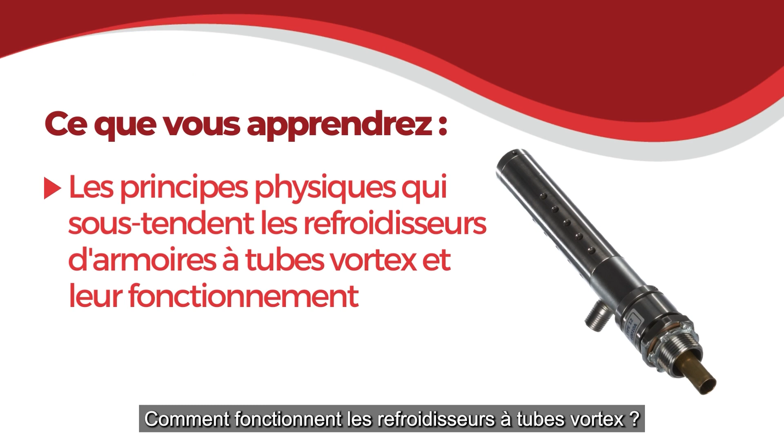How do vortex tube coolers work? When you first come across vortex tubes, they seem like magic. We have a device that has no moving parts, no power source other than the compressed air that goes into it, and can produce temperatures down to minus 40 degrees C from an ambient air temperature. All this with no refrigerant chemicals being used.

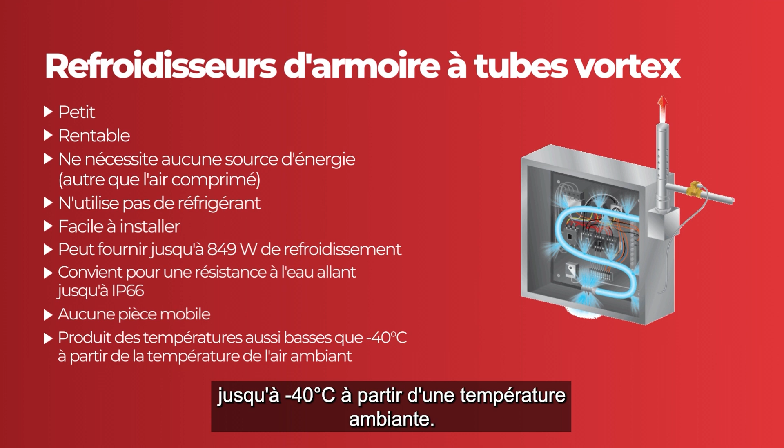It sounds a bit like magic, but it's actually basic physics, although the physics is actually quite complicated and in some cases debated. We're not 100% sure how it all works, but they do, and I'll attempt to explain what we do know about how vortex tubes work in this video.

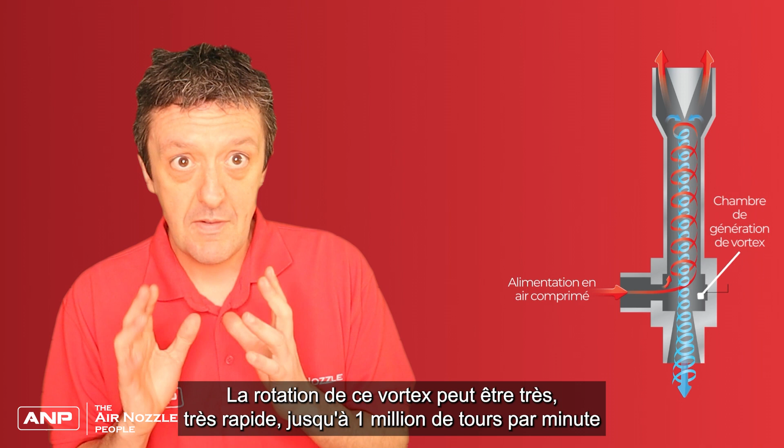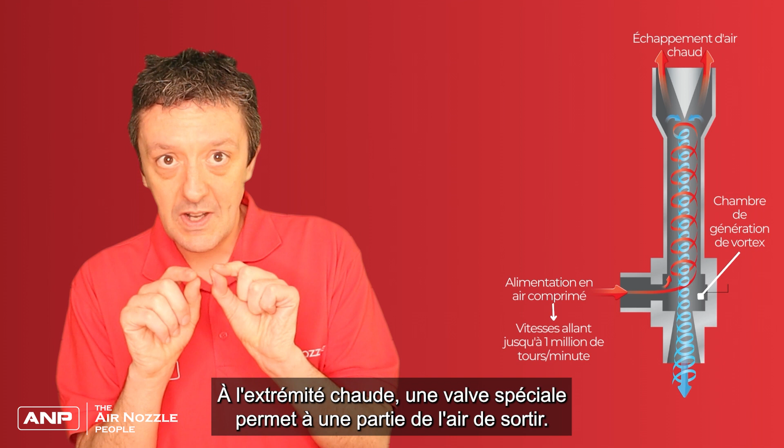So in a vortex tube, compressed air, as the name suggests, is forced to move in a rapidly rotating vortex. Now this rotation of this vortex can be very, very fast, up to 1 million revs per minute in some cases. So it's moving very, very fast around the chamber inside the vortex tube. Now at the hot end, a special valve allows some of the air to exit. Typically about 30% of the flow is allowed to exit.

This valve is shaped so that only the outer edges of the spinning vortex escape, and the rest of the air is actually forced back down through the vortex into itself and into the tube through the center of that vortex. So what we've set up here is a very rapidly spinning vortex flowing up on the outer parts of the chamber, and then it's reverberating round, rotating in the opposite direction through the center of the vortex.

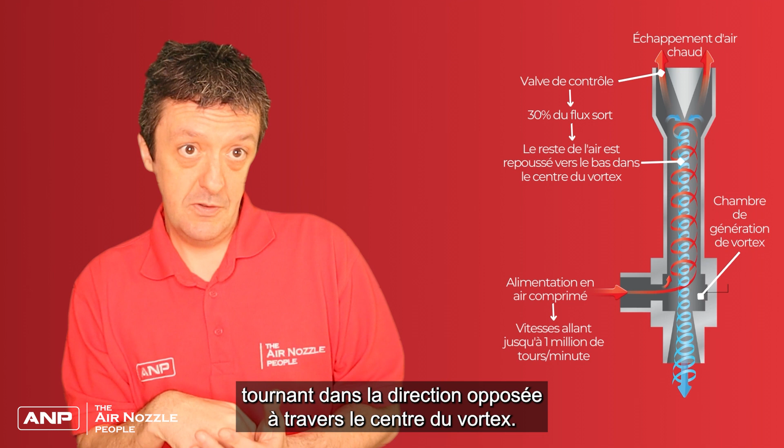So due to the motion of these two airflows, we have a lot of motion and a lot of friction between these two airstreams. And what we're effectively doing here is setting up a heat exchanger. The outer part of the vortex heats up, takes heat from the inner part, the reverberated airstream.

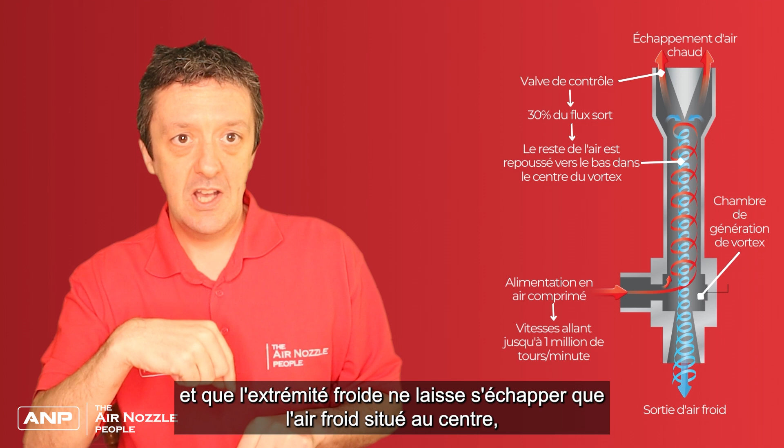As the valve at the hot end is shaped so that only the hot air escapes, and as the cold end only allows the centrally located cold air to escape, hey presto, we separate the air into cold air coming out one end and hot air coming out of the other, all with no refrigerants, no other external power source.

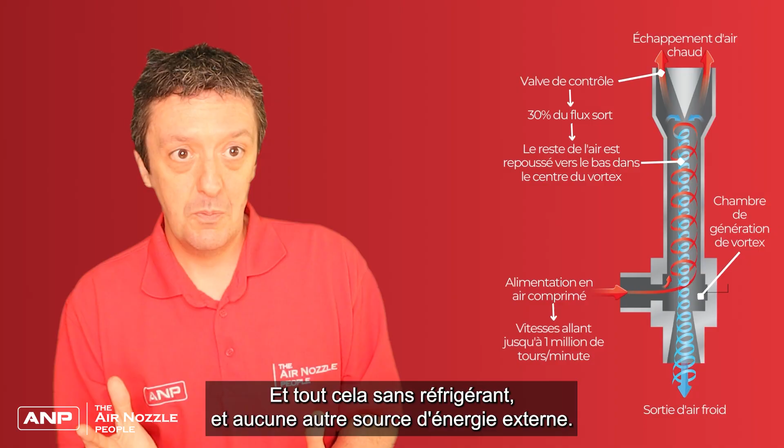Now, no actual heat is generated in the vortex tube. The heating of the hot air exhaust matches the cooling of the cold air. No energy is being added to the system, added to the compressed air. It's purely separating it into a cold and hot air stream without adding any energy to the system. The ratio of cold to hot air can be adjusted just by changing the valves.

Normally the optimal cooling can be achieved by having the cold fraction around 70%, so 70% of the air is cooled down and 30% is heated. Now obviously the 30% of hot air has a greater delta T, a greater temperature rise than the 70% of cool, so the hot end can get quite hot.

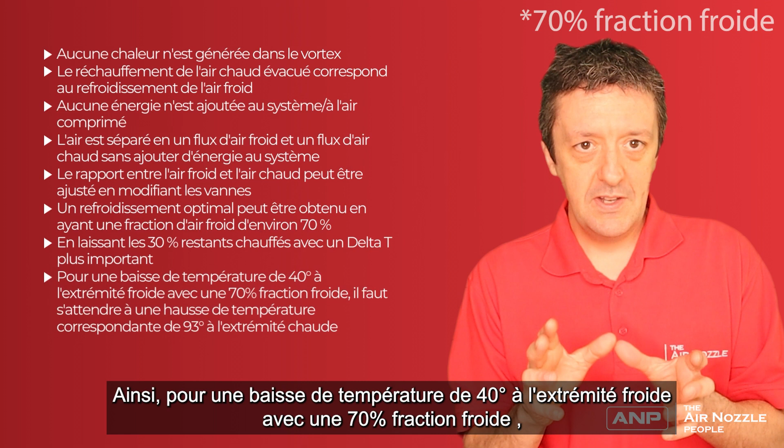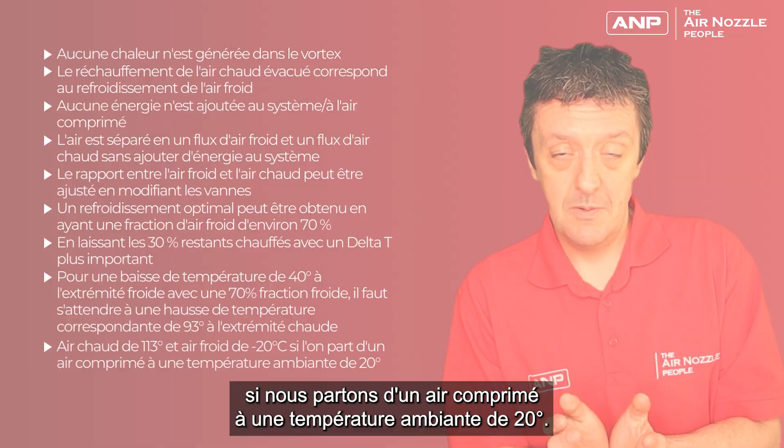So for a 40-degree cold end temperature drop with 70% cold fraction, we would expect to see a corresponding 93-degree temperature rise on the hot end. So we would get hot air of around 113 degrees C and cold air of about minus 20 degrees C if we're starting off with compressed air at a 20-degree ambient temperature. So there's many, many applications where these seemingly magical devices are very, very useful in factories around the world.